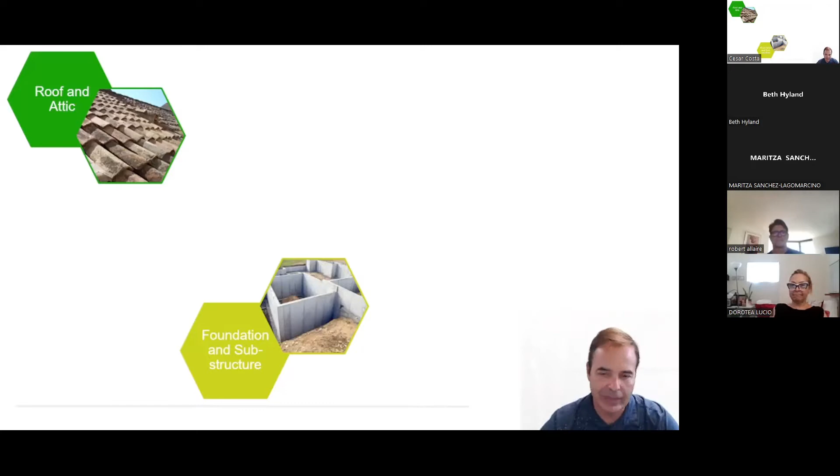We cannot see the foundation, but when there is an issue with the foundation and the house starts to respond and move, because the house is a system, any movement in any element is going to be reflected in other elements. So if the foundation is cracking and moving and the soil is moving, the floors will crack, walls will displace and move and crack. Sometimes the roof responds, sometimes you can see it in the trusses in the attic, and you can have an idea of what is going on. So that assessment is also included. Property inspectors can see if those cracks are structural cracks or not.

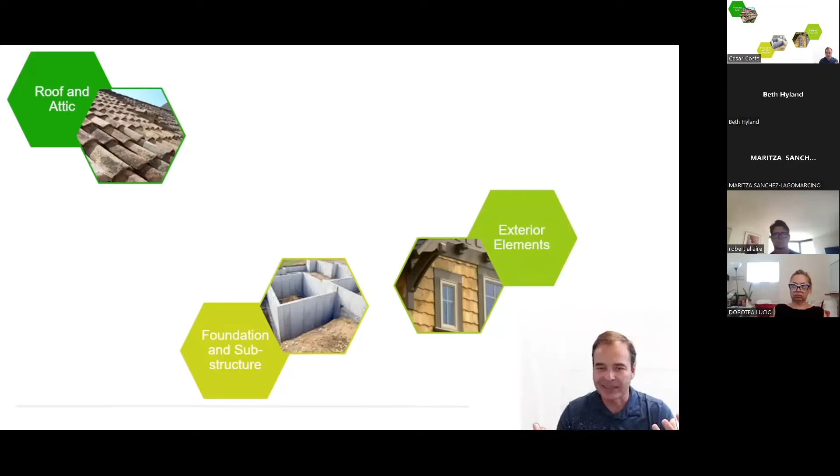The envelope of the house is very important to also keep the property watertight, maybe energy efficient, maybe keep insects and intruders away. So taking a look at the envelope of the house is very important. And then come the mechanicals. That includes the AC, electric panel, plumbing.

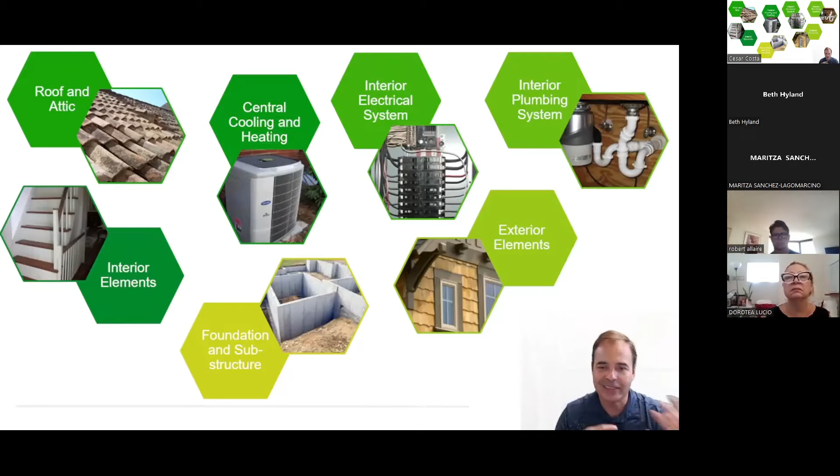AC is important because it's one of the most expensive systems in the house. Electrical is important because it's where most of the fires start, so fire hazard is related to electrical. And plumbing is very important because leaks in drywalls can trigger mold and can affect environmental conditions inside the house. So those systems are very important.

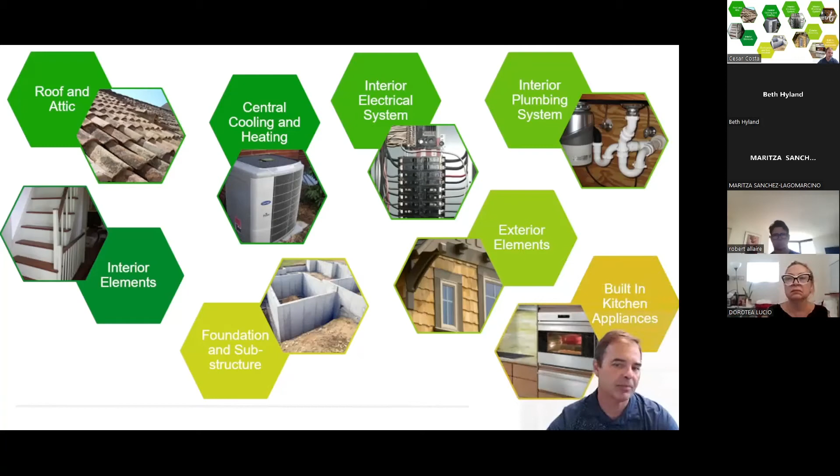Those are called mechanicals. And then interior systems, appliances, and everything else: doors, windows, interior elements. Usually an inspection takes a couple of hours. If you want to know what is included, you can type on Google standards of practice of property inspections.

You're going to find ASHI, InterNACHI, FABI. FABI is a great one, Florida Association of Building Inspectors. Those guys do a great job. I'm part of FABI as well, having meetings every quarter and keeping inspectors well informed. InterNACHI is great because there are a lot of online trainings and certifications. So for those inspectors that don't have the time, they can do the trainings on nights and weekends.

And ASHI is the national standard. Actually, HouseMaster helped a lot to build that standard 40 years ago. This is a very solid standard. They all copy from each other, and they're very similar. And also we have the law.

The law is, coffee much needed, yes.

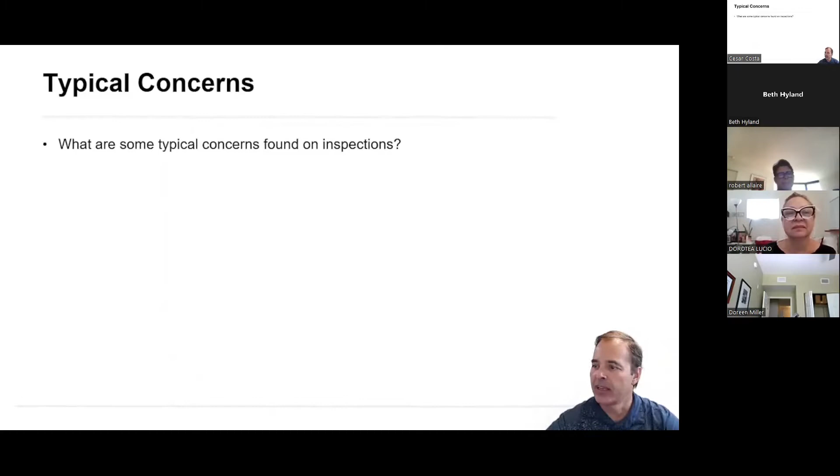All right, so let's go over property inspections for realtors part number 2 here on the first day of our 4 hours training. And I'm gonna go over some typical concerns found during the property inspection. So the first one is identifying end-of-life signs, right?

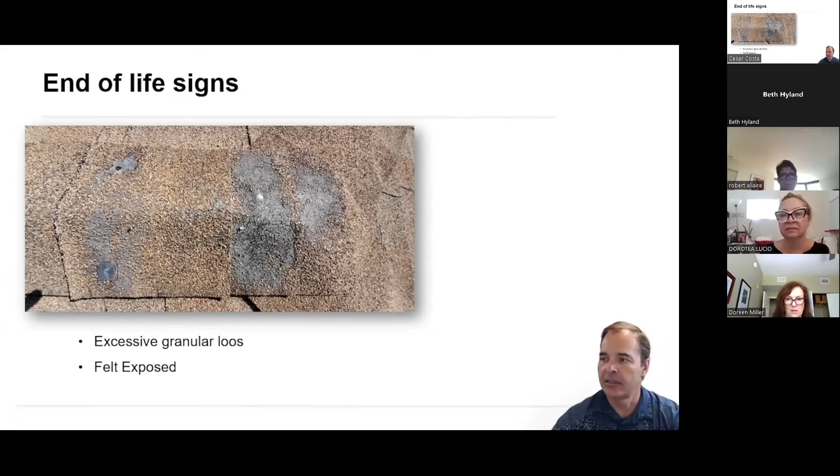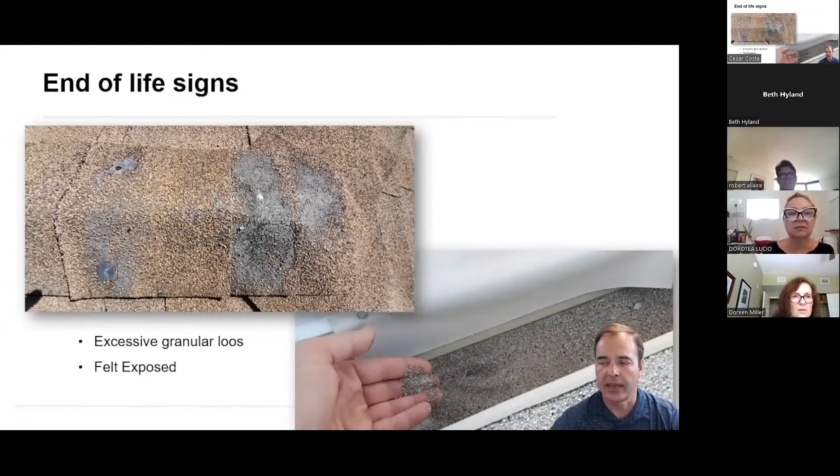So if I take a look at the roof and I see, for example, in an asphalt shingle roof, exposed nails, the felt being exposed, excess granular loss, those nails are rusted over there in this picture. All those are signs that that shingle is losing its capability to protect the deck from the water. Those granular losses are going to show in the gutters as well as a sign. So all those little details, everything counts.

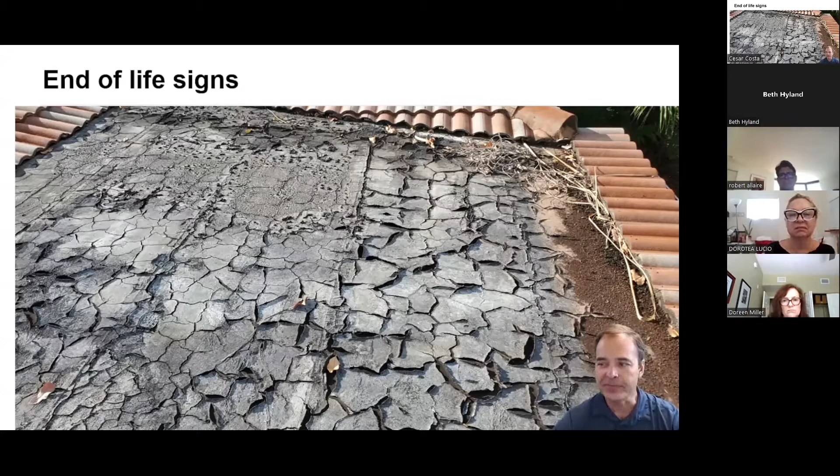Christian is saying, no bueno. It's all broken, it's dead. So we can see when the roof is at the end of its life. So on the membrane, typical signs are alligatoring, as Jerry just mentioned here, is when you see that cracking and surface that resembles the back of an alligator.

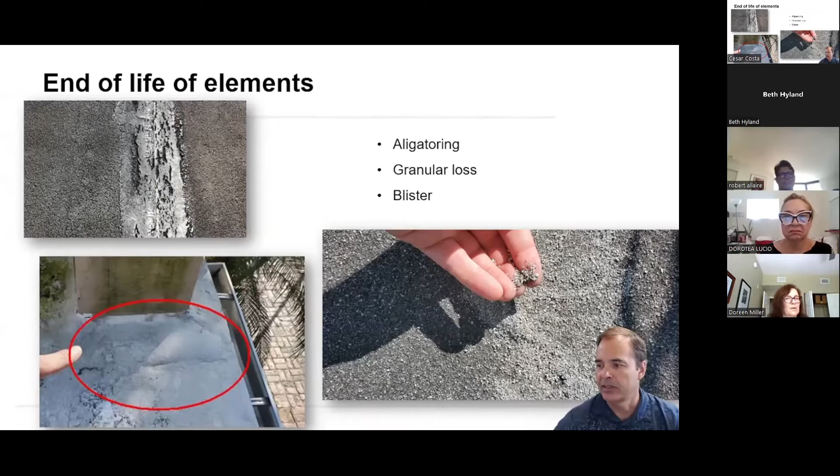When we see bubbles in a membrane roof, it's a sign of moisture entrapment. So humidity is getting below the membrane, which means that water is getting there somehow. That's a defect that needs to be reported. Granular loss, and when you have all those combined, cracking, alligatoring, granular loss, blisters, and bubbles, that's a sign that the roof is approaching end of life, and you are gonna need a professional repair there.

Another example of end of life, for example, in a water heater, would be excessive corrosion on the pipe connections or at the bottom of the tank. So let's say the tank is 15 years and there are no signs of corrosion. Maybe the tank can last a few more. We don't know, but it's probable.

However, if I see a tank that is only 8 years old and the pipe connection is rusted on the top and the bottom is exactly as this picture, you see all this rusting, this is end of life. Because when the rusting gets outside, imagine how it is inside. The rusting goes from inside out.

So much better than just looking at the age on the label of the water heater is to see what the actual conditions are, how it has been used and maintained. And I'm going to show you, element shows signs of end of life. That's a good evaluation.

I have some questions here. Patricia: to insure the property, what is considered end of life for a roof? Well, we need to see those signs of end of life, right? And I gave you a couple of examples. Alessandra: for insurance purposes, carriers don't like anything over 10 years. It depends on the roof.

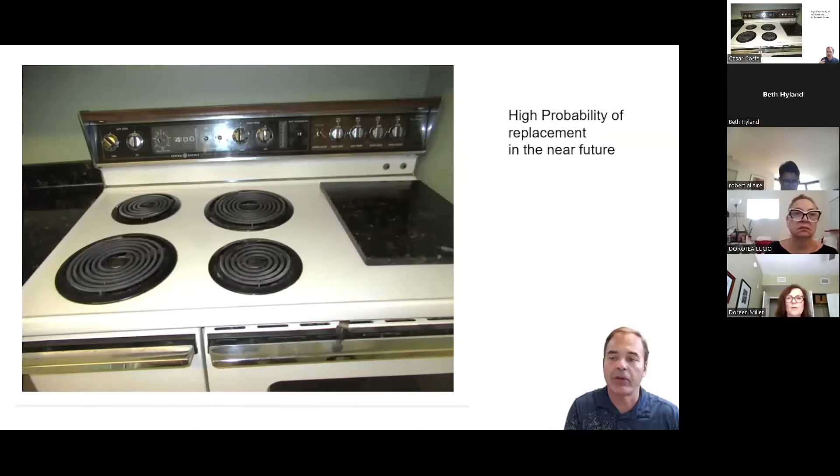All right, so I was saying on the inspection, one of the very important evaluations is end of life. Is the roof at the end of the life? Are the elements at the end of the life? So the water heater is just one example. This one, for example, it's a stove that has 35 years of operation. It's working fine. I'm not going to tell them to replace. There's no signs of end of life. But they need to be aware it's older equipment. They cannot find parts for replacement, and if it breaks, they'll have to replace. So it's just a higher probability of replacement in the near future.

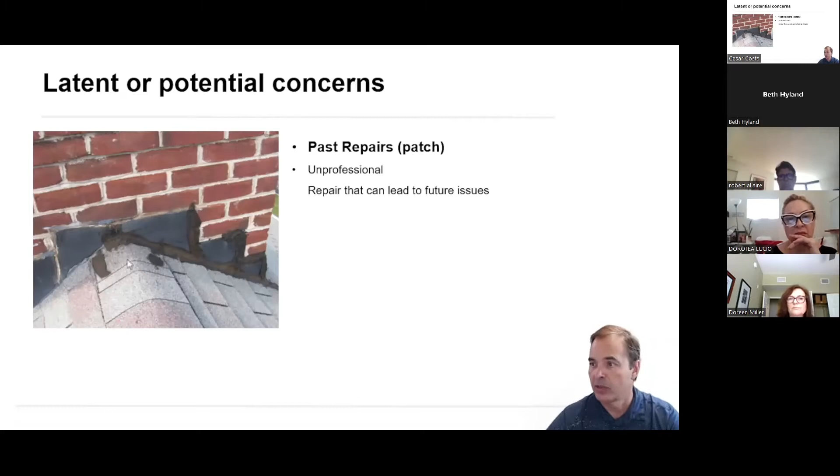Another item that is important here for the property inspections is evaluation of potential or latent concerns. So those are potential issues that will arise given the conditions. For example, in this picture, this roof was repaired, that's fine, but the flashings are not properly installed. They don't go inside the brick. They used inadequate material to seal. The way that the flashing is attached here to the shingles, it doesn't go below it. I know that it was done by a handyman. It's kind of a patch. It's called unprofessional repair, and the life of an unprofessional repair is shorter. They will have an issue here. If they repaired, it's probably because they had a leak, and the leak will show up again in the near future. So those are the things that are good to call attention to.

Another latent concern, and that's very common, is water ponding on flat roofs. Listen, flat roofs will leak. Why? Because the water just sits there. Ideally, you want a roof to take the water away to avoid the risk of leaks, right? That's the function of the roof, to make the water go away. And a flat roof that doesn't have any slope is completely flat. The water is going to just pond and stay there, just waiting for an opportunity to find a way down to the other building elements. So flat roofs have a high probability of leak. And I always call the attention of home buyers if they are buying a property with a flat roof, because they require more maintenance. If you have a flat roof, you should have a roofer stop by every 3 years to take a look and keep resealing, because those roofs will leak.

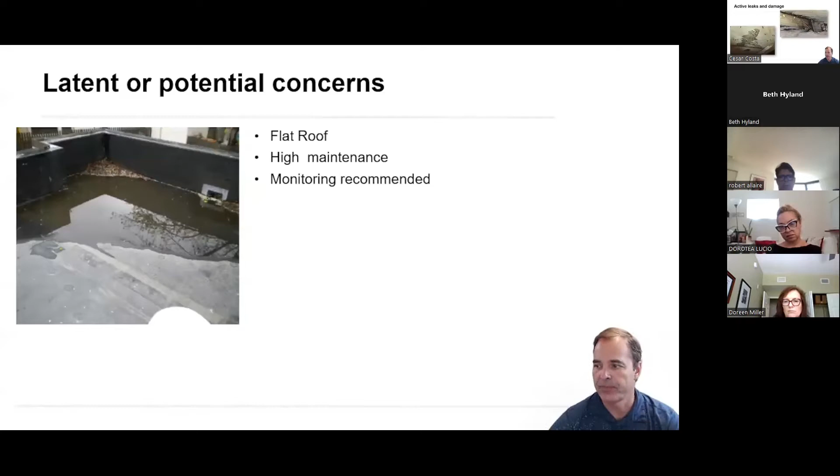The best way to find leaks in roofs is through the attic. So you want to have your inspector go over the roof, take a look at the overall conditions of the tiles, estimate lifespan and how many years remaining you have. Here in Florida it's important for the 4-point and insurance renewal, but the best place to see if there's a pre-existing condition, if there's roof leaks, is through the attic. When the roof leaks, the water is going to go through the membrane, it's going to reach the roof decks, and you will see those stains.

So have an inspector that spends a good time in the attic with a flashlight, looking at all those little corners, everything that is visible and accessible. Not all attics enable access everywhere. Newer houses have more room, and we can navigate and go around more. But spending time and seeing those things, that would call attention. And as you asked before, yes, if you have a leak visible in the attic, that's a pre-existing condition, and it will need to be fixed before you can renew the insurance here in South Florida.

All right, so the issue then with leaks, they're small and they don't have enough volume to drip so you can see in the ceiling, they're just there in the attic, is that this humidity staying in that wood may trigger two conditions. One, termites. Termites love humidity in the wood. This is just a magnet for termites.

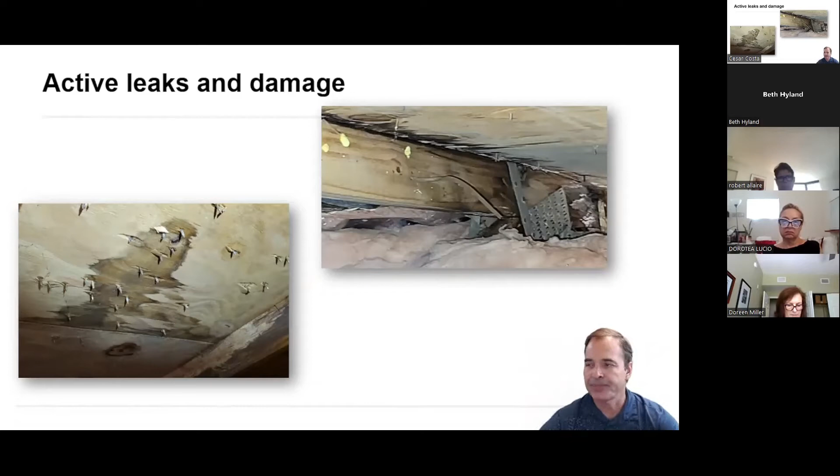So those small leaks that have been there for a while, and you can see if it is older, if the wood gets darker, like this one on the right, very dark wood, yeah, this has been leaking for a while. So the higher probability of having termites, and also mold will develop when you have humidity. So you need to be careful there.

So this is a good picture that illustrates that point. You see this wood is very dark here in the corner. And surely enough, termite here. You can see the termite damage. So they start here in the soffits, fascia, on the border, and they make their way in. Very common here in Florida, dry wood termites.

They fly around May. They find their entry points to soffit, fascia, and ventilation. And if they find any point with moist wood, they will start a new colony right there. And it's higher probability that leaks will happen on the borders because you have more volume of the water. It's the ends of the roof. It's where most problems start to happen, is at the edges.

Jerry, Alessandra, you may mean they don't like Florida litigation issues. Yeah, that's a good comment, Jerry.

So here are the termites. All right. On the leak side, another very important investigation that inspectors should do is around doors and windows. Doors and windows usually have a silicone and a sealing around them to keep them watertight.

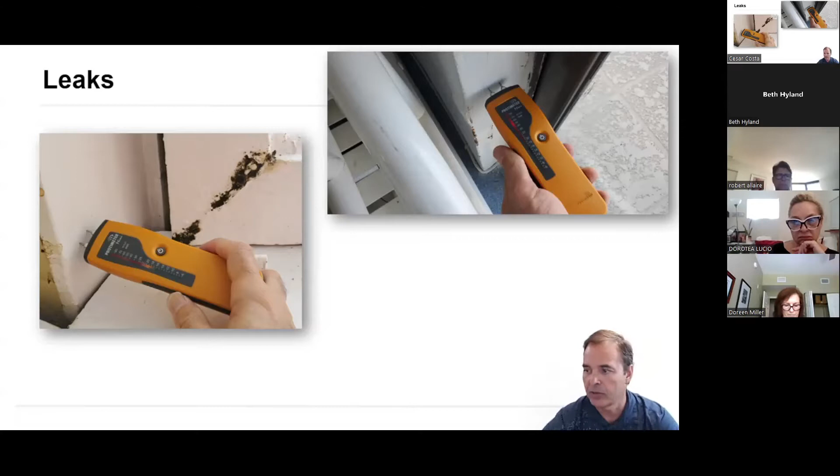The issue here, though, is when the water goes around from outside to inside and reaches the inside, the joists support the beams, the wall voids might have humidity inside, and you might have mold behind drywall. So you need to open up and repair everything to avoid any further issues. And one place that you don't want to find leaks and humidity is around AC.

And it's common to find, though, humidity on the AC box, that box that supports the air handler, because one of the byproducts of the refrigeration is condensation. Every time that you cool down air, you're going to extract humidity. And as the coils get dirty, it might clog the condensation line.

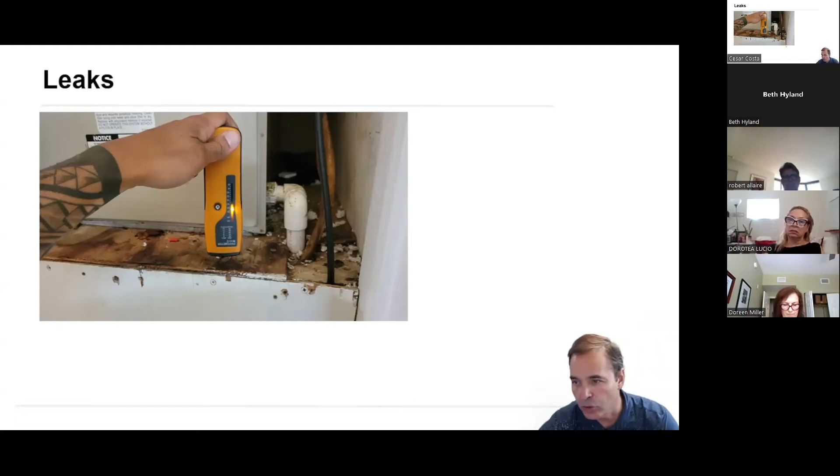You might have a leak on the water heater, and that brings humidity on that plywood that's supporting the AC box. If you have humidity on the box, mold can grow on that box. And humidity around the AC is not a good idea because that mold can be recirculated around the house and people can get sick. So you don't want to see moisture around the AC box.

And also be very careful when there is moisture around the fascia and soffits. This is a great picture that shows that. You see on that fascia rusted nails, the wood is getting rotten here, and it might not look like a big issue, but every time that you have fascia getting wet, usually it is from inside out, and it might be a leak that's coming from the roof system, on the border of the roof system. So this needs to be investigated.

And every time that we have that moisture and rotten wood in the fascia, it's just a door for a termite infestation. As I told you, termites love moist wood. In May, when they swarm here in Florida, they will land exactly in that place and they will start a new infestation. Dry wood termites are very common.

Somebody said before, and I love that sentence, there are two kinds of homes here in Florida. The ones that have termites and the ones that will have termites. I love that statement because, at one point in time, they will get there. You need to be careful with the maintenance of your property.

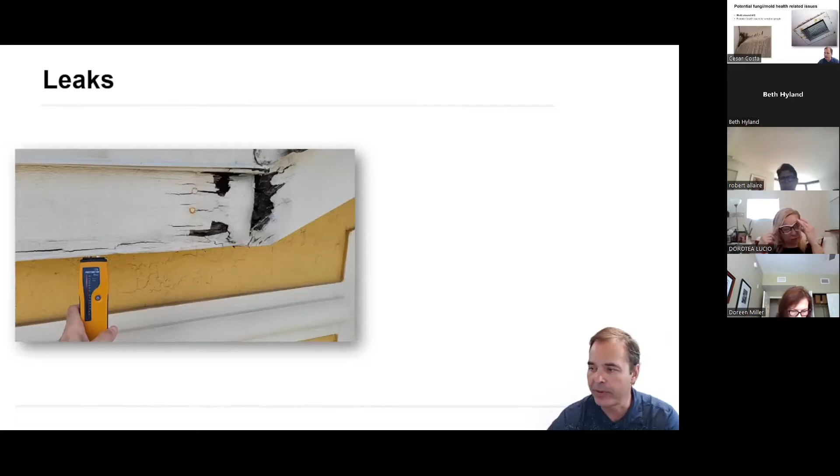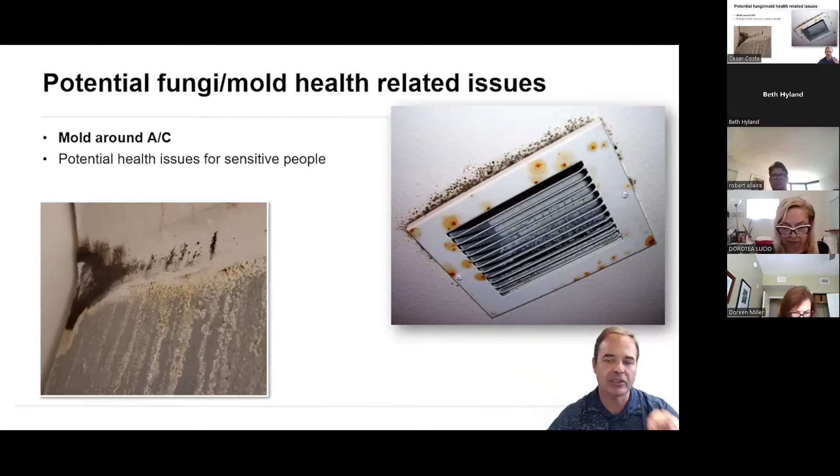So still on that moisture investigation and detection, I mentioned to you that having humidity on the box that supports the AC, you need to be careful because of mold. Also, take a look at the plenum. Take a look at those pictures of the plenum. Those mold stains are very common because sometimes the plenum is not well sealed. Air escapes, condenses, and creates mold. And also around the vents, you don't want to see signs of mold around AC components, because the AC leverages the effects of mold and people get sick. All right.

Moving gears a little bit here, besides roof, water penetration, and moisture, let's take a look now at safety and electrical. One very common concern, specifically here in Florida, is those panels. They are not accepted by the insurance companies. There are 4 brands that you need to pay attention to: Federal Pacific, Zinsco, Sylvania, and Challenger. Specifically Zinsco and Federal Pacific, and specifically the Stab-Lok design. That's the one I showed you in the picture. That rounded, colorful one, that design, it's a no.

What happened there is when they built those panels, in the 70s, they used aluminum. Aluminum was cheap. Everybody was using aluminum because it was cheaper than copper. There was a shortage of copper. However, they found out later that when you have a strong short circuit, the aluminum melts and doesn't break the circuit, and some properties caught on fire. So the insurance companies see those panels as a high risk of fire. They will not take the insurance. They will request you to replace them.

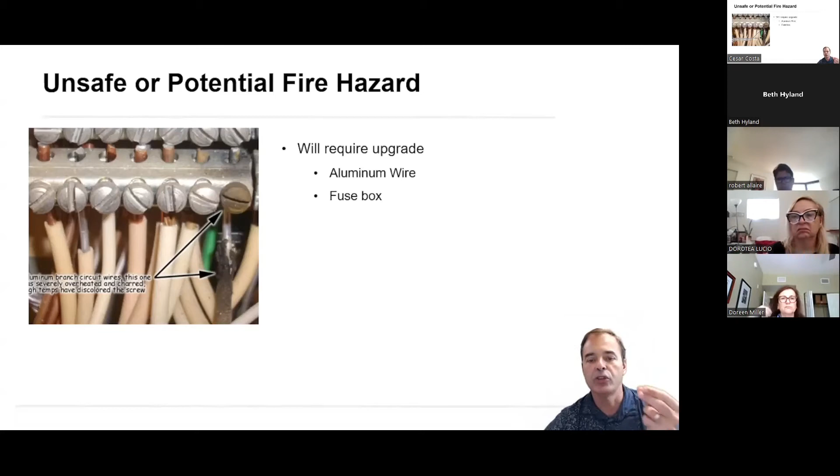Still on safety, you have aluminum wire. The issue with aluminum wire is that aluminum expands and contracts much more than copper. So those wires can get loose on the board, and as they get loose, they can create sparks, and sparks can generate fire. That's why they don't like branch solid aluminum wire. Aluminum wire that comes from FPL to connect the main panel is fine, it's stranded, they have proper connections for that, no problem at all. But solid from the distribution inside your house, not a good idea. They will request either to change the wire or use aluminum connections.

Another one is cloth wiring. They are common in the 50s and 60s, maybe the beginning of the 70s. The issue here is every time there is a strong load on a circuit, like when you dry your hair with a 2000-watt dryer, as soon as you turn it on, the current takes a few milliseconds to get stable on that circuit, and some arcs might happen between wires given the load. As I'm showing you here in the picture, it's a voltaic arc that can happen.

And if you have cloth around the wire, even if they are plastic insulated, even if they're accepted by the insurance, such as Anaconda wire, that cloth can catch the spark, and some properties caught on fire because of that. So cloth wire is a safety concern. You should replace the entire wiring of the house. That's always our recommendation. And this other kind of cloth wire in the picture on the back, that's a no-no, because the cloth is directly in contact with the wire. This one, Anaconda, is accepted by insurance, but it's recommended you replace it.

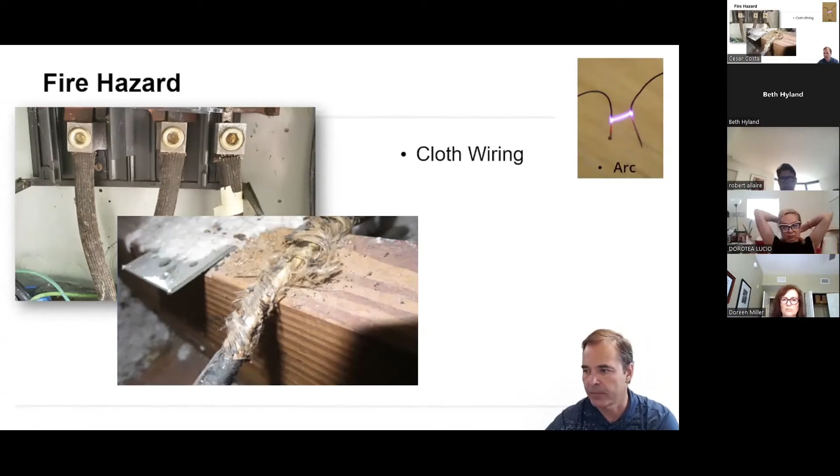Okay, another topic is cast iron pipes. When they built those properties, 70s and before, they had that horizon that these pipes would last 50 years, maybe 100. Wow, that's great. The material is going to last for a long time. Guess what? 50 years has passed. Back to the future, right? After 50 years, especially here in South Florida, because the soil is so humid, the corrosion might get to a point that these pipes might not be usable anymore. It's the end of useful life.

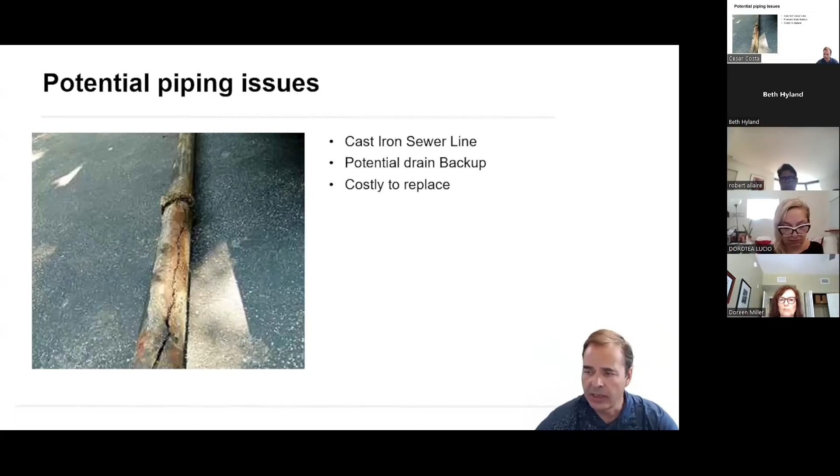If the pipes crack, dirt is going to get inside, they will clog and can create a backup and a mess in your house. So ideally, if you have properties from the 70s and before, you want to have a camera scope inspection to see if those pipes are broken. You will have to replace those. It's a matter of time. Maybe 5, maybe 10, maybe now. So you want to have that idea during the inspection to avoid costly surprises. To replace those pipes, it's about $15,000. That might be the cost of replacing an asphalt shingle roof on a small house. So that's relevant, it's important, it needs to be done.

Patricia has a question back on the cloth wire. Today, no cloth is used. Everything is plastic, designed not to catch fire. It's thermal insulated plastic. Yeah, Jerry, the second cloth wire. Yeah, exactly. That was a beautiful example. Those pictures, for me to be able to find those specific situations, sometimes it takes 1,000 inspections just to find that one picture to put here in the report. And everything here I took with my camera, so it's inspections that we have done.

All right, so piping issues. Cast iron pipes are one. Another one is polybutylene pipes. Polybutylene pipes were used in the 80s and they were discontinued in 1994. But what happened is that in 94, builders knew they were going out of production and they were stocked with those pipes. They used a lot to finish the stock. So there are a lot of homes, 94, 95, up to 96 with poly pipes. So I'm very careful when the house is built in 1994, 95 to search for those pipes.

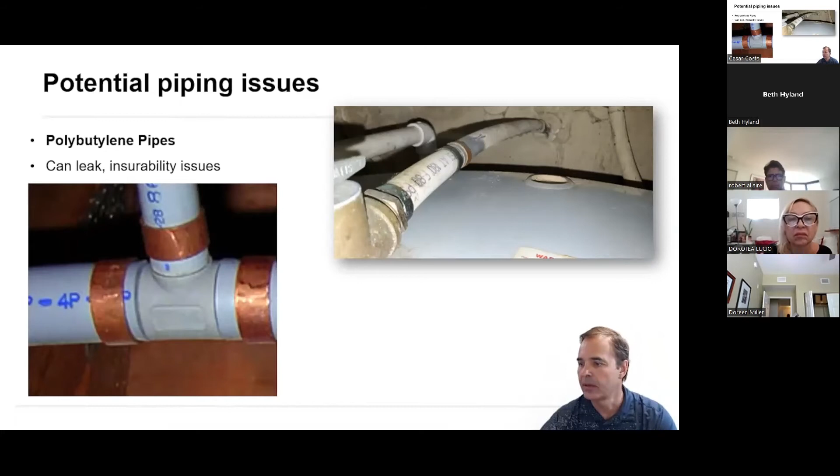All right, defective installations, that's another topic. Some elements are not installed properly. One example, and it's very common, is water heaters. The water heater has a TPRV valve, temperature and pressure relief valve. That little thing on the top of the water heater. That's because if the thermostat doesn't turn it off and the tank keeps heating, it can explode and become like a rocket. You can find funny YouTube videos of water tanks just going like rockets. So that valve will avoid that, because if the temperature and pressure build up in the tank, it is going to release and let the water flow away from the tank and avoid an explosion.

But this valve needs to have enough throughput. Most of the valves here in Florida require a 3/4 pipe. But when the handyman comes to install, not a plumber, they're going to put a 1/2-inch pipe. It's not up to the specifications. This needs to be fixed. It's a safety concern. So something so small, like a small piece of pipe, can be a safety item as well.

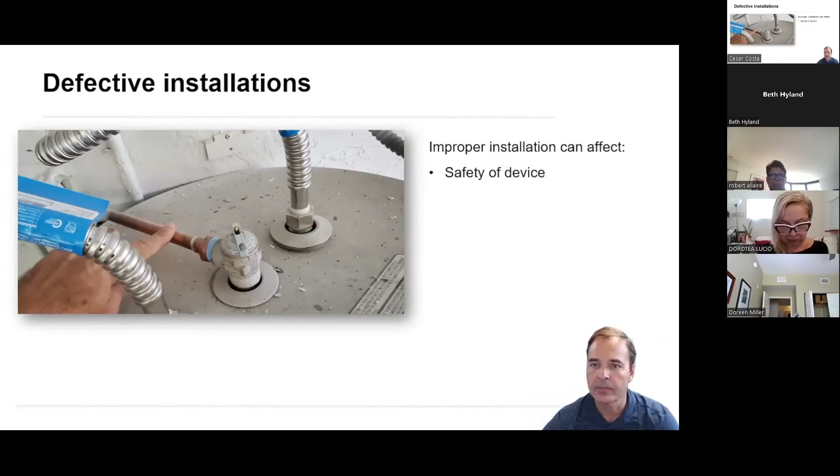So let me see some questions here in the chat. All right, can I ask the inspector? Okay, infrared camera, answered already. We will be able to tell if there is a leak that was painted over only with the infrared camera. And listen, I think there are a couple more in this list, but I can't find them. Okay, if you find out, let me know, Alessandra. I'll come back to that issue for you. Jerry, I already saw this. Patricia, okay, I already went over this one.

Okay, Jerry, how would you know if a pipe under the slab is leaking? Water usage increase? I got, Jerry, one of those cases: the supply pipe under the slab was leaking and we didn't see it. So if it's leaking just a little bit, it's going to be almost impossible for you to know. It's going to be through the water bill, and it's harder to investigate as well.

But with time, as these leaks expand, that humidity is going to go through the slab, and by capillarity you're going to see stains, and that is going to start affecting the floor. Then we can see the leak. So it all depends on the volume and time of the leak. Those are the issues that are hard to catch, and those are the limitations of the inspection. Those are called concealed defects, situations where we can't help much.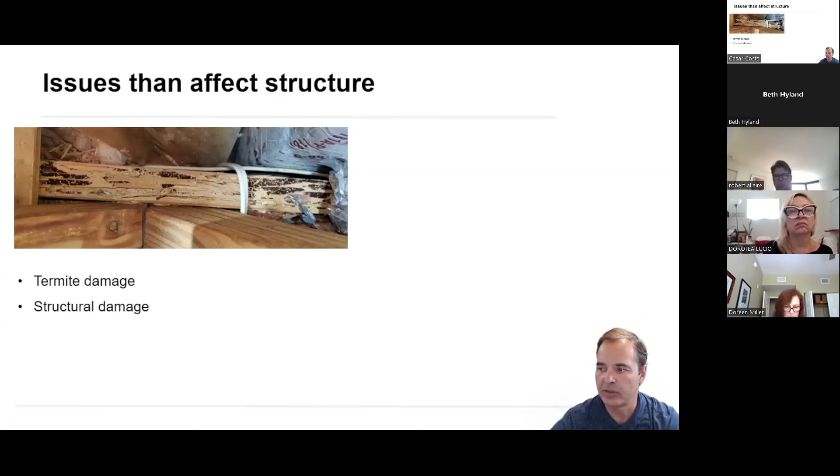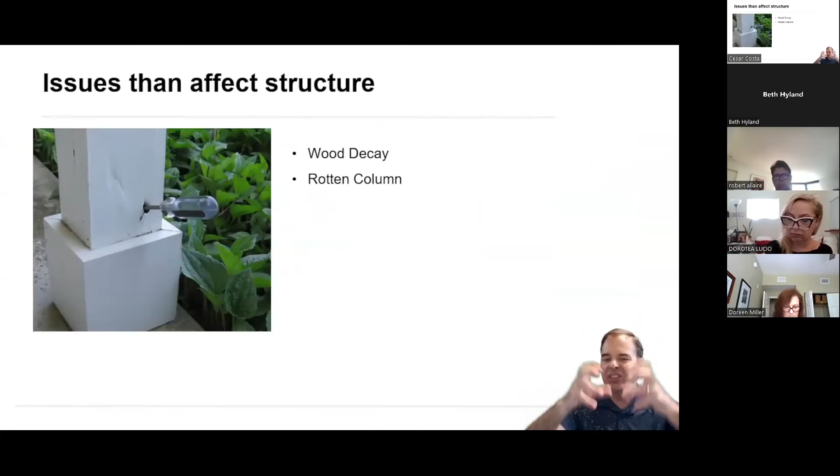So, issues that can affect the structure. This is one example. Drywood termites have been in this house for a long time, more than 10 years, and they have been eating a lot of those trusses. This is looking bottom up, so that can affect the structure. Probably this piece of wood needs to be sistered and reinforced to keep the integrity of the structure. Also columns and support pillars, like this one: you see my screwdriver went all the way through. It's rotten and can affect the structure of the house. That should be noted, anything that can affect the structure.

And this picture exemplifies well what a structural concern is. A hairline crack is random, very thin, and doesn't follow a specific pattern. But a structural crack usually follows through the bricks and moves along the structure. You can see this crack starts very small, follows the brick, and widens up. Like an alligator, it starts small and widens up. That's a structural crack because you have displacement, you have movement. Things are getting separated, so you know there is movement.

In this case, you might need a structural engineer to evaluate. Sometimes you need to put in those helical piers to reinforce and bring the structure back. Anything can be fixed, but it's important for you to raise that flag that something is going on. This other picture also widens up. If I take a quarter and put it flat and it fits in the crack, that's an important crack, and usually that is structural.

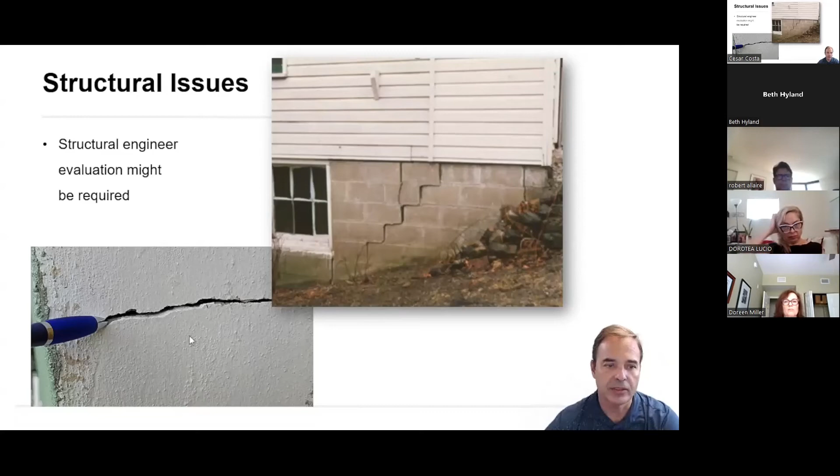And in this case, it's not only moving this way, but also this way, vertically and horizontally. We have two kinds of displacement that show movement, and those are the situations where you need to be careful, and they should be noted. To finalize, what do you think about this picture here? What is going on?

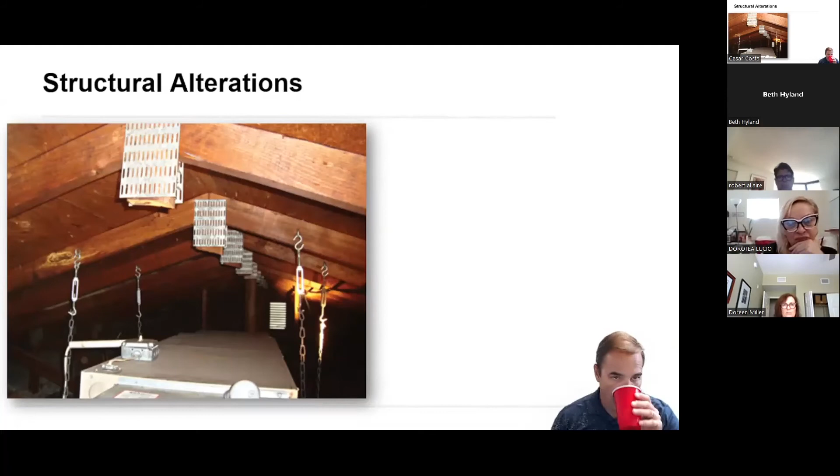While you tap the picture, I have a quick question here for Lema. What if the home has cast iron pipes? I'm going to talk more about that tomorrow. It's a good idea to do a sewer camera, snake camera scope, to look inside and see what are the conditions of the pipe.

Gandhi has a question here. Homes that are unattended, or you have an outside valve, pressure cleaning companies drive up, fill up the water tanks on the back of the truck, most recently happening to one of my listings. Yes, that's a good point. Thank you for sharing.

Jerry, get out from under that roof.

Yes, exactly. Patricia, the building that collapsed in Miami, why was it not caught? That's a long story. We can talk offline because I want to focus on the things that we want to cover here. It was apparent, it was structural, there were signs. What happened is that the people didn't take action on what was already spotted before. So now they're going to include 4-point inspections for condos, but that doesn't address the structural concerns. But that's a big topic there about the Miami building.

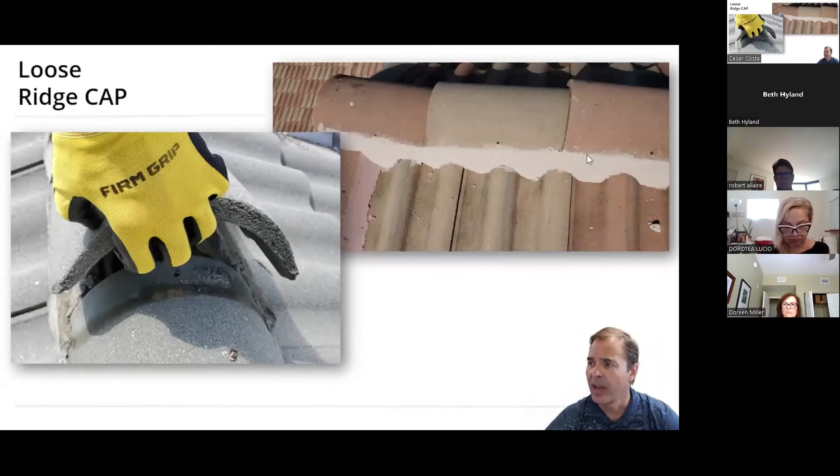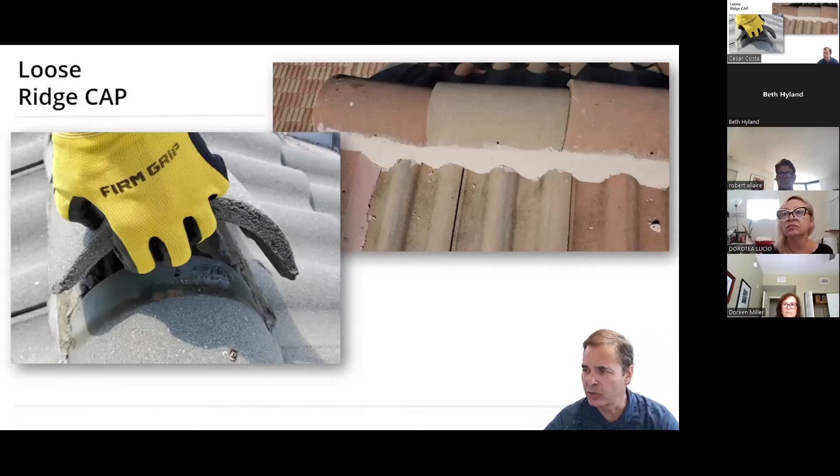But keep in mind, though, that 86% of issues are just maintenance. And we got a lot of maintenance. So only less than 15% are a concern that you should be worried about or take into account. Everything else is maintenance. Even loose ridge caps in the roof, that's maintenance. All old roofs will have loose tiles. And what can you do? Just cement them back, like I showed in the picture. I saw roofers trying to sell new roofs because of loose tiles, because they're trying to make money. Most of the cases, you might not need it. Just cement those back. If you have broken tiles, you need to replace the tiles, but most of the time you just cement back, very simple repair.

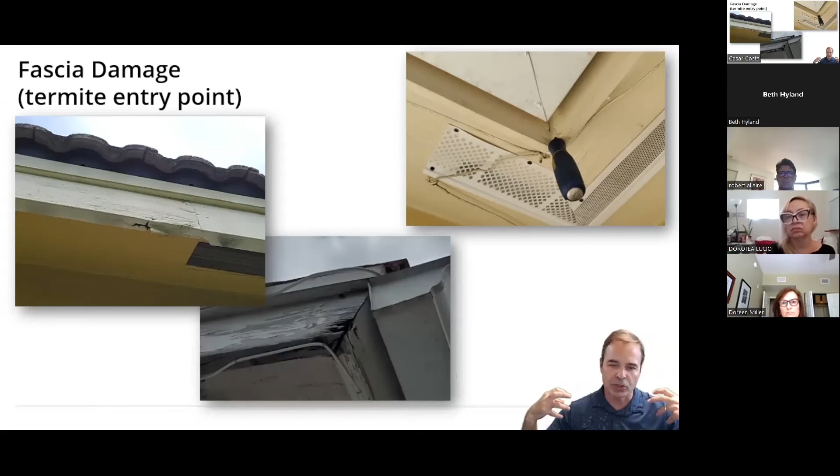Be very careful with fascia maintenance. I mentioned that before because that can be a termite entry point. Use a moisture meter, you can probe with a screwdriver. Take a look here, my screwdriver went in all the way. So they painted, they're trying to cover, but this wood that is damaged needs to be replaced, because when you have that moist, rotten wood, it's gonna be just a magnet for termites. It's like when you go out on the Everglades at 7 p.m., end of the day, you just attract those mosquitoes, right? And you're gonna get bitten a lot. This is the same thing, it just attracts those termites. They start from the fascia, soffits, dry wood, they make their way, they keep crawling. When they reach the attic entrance, it's because they have been in that house for a while, 5-10 years.

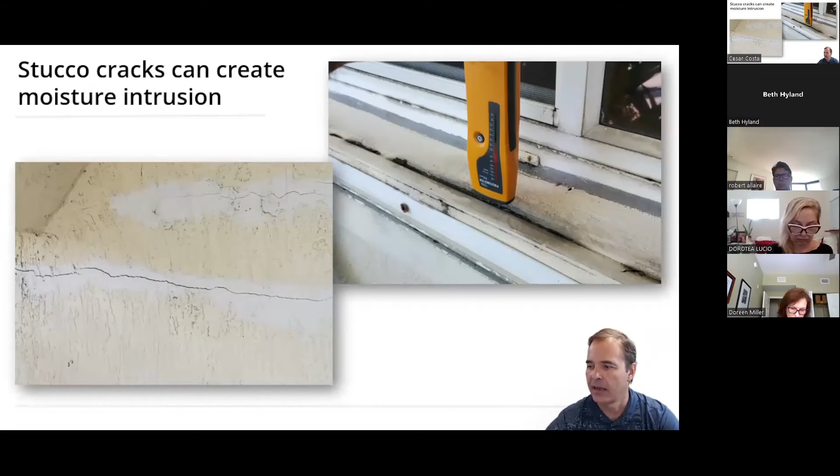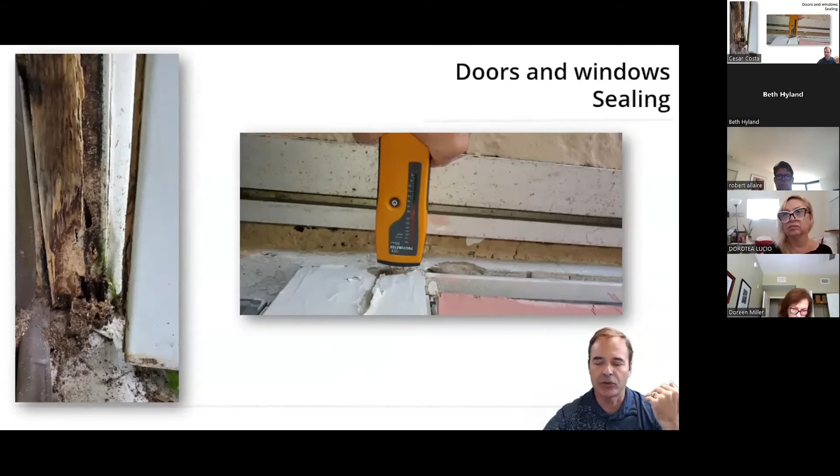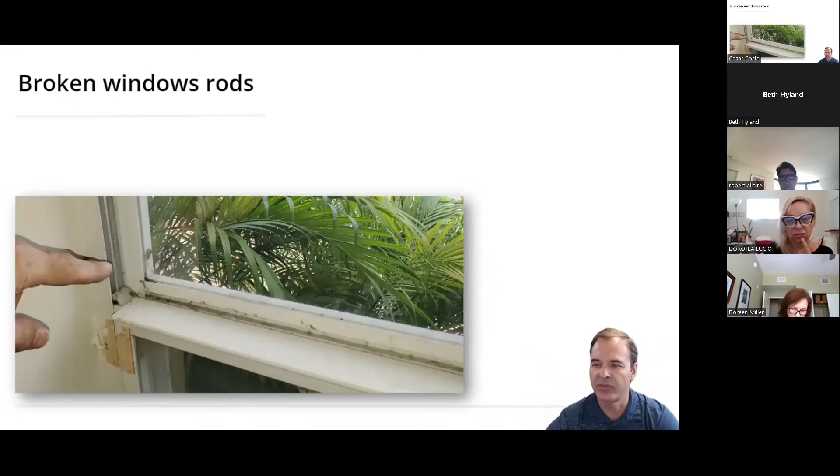Cracks outside need to be sealed because water is gonna get inside, and with time it's gonna get to the drywall, moisture will develop into mold, and that can affect living conditions. It's very important to seal doors and windows because that moisture is not only gonna go to the inside through capillarity, but also that rotten wood will attract termites. Broken rods we find all the time. People don't open windows so much here in Florida, and they tend to break when you use them after 20 years. It's a good idea to have maintenance once in a while, every 5-10 years, to fix those rods, lubricate windows. Most people don't do it.

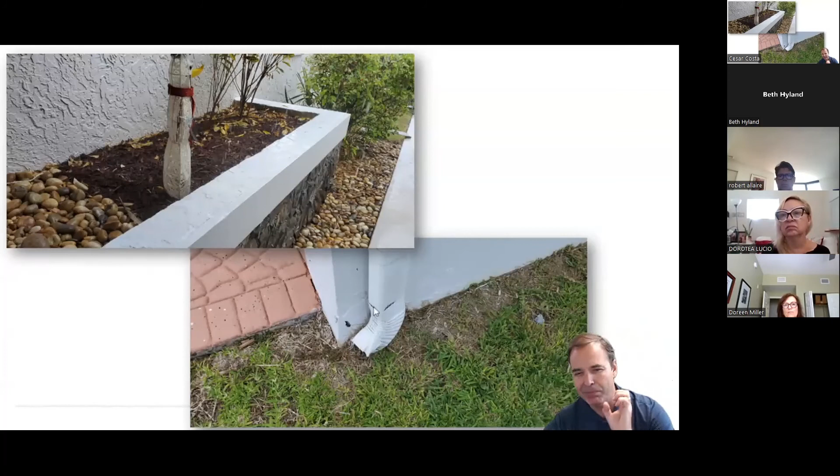You want to avoid having water accumulation around the house. Those planters are not a good idea because that water is in contact with stucco, especially if you have a wood frame house, or water around the foundation, this is just a magnet for termites. And we don't want to attract subterranean termites. Another block of things that are seen on inspection concerns safety. And those are very small, very simple to fix, but yet very important. Double tapping: you connect two wires to just one breaker.

A handyman came there to add a new circuit, add something new to the house. Instead of connecting with a wire nut, they used the breaker to connect additional wire. It's not allowed. An electrician would never do it. When I see this, I know there was a handyman. That's because when you increase the volume of copper on the connection, you increase the expansion and contraction, and that wire can get loose on the connection and create sparks that can generate fire.

There is a proper way to connect wires. You use a wire nut outside of that breaker. Very simple. Can be done in 10 minutes. But you will not be able to get insurance if you have double tapping. Insurance companies will also not take lack of grounding. Those two-prong wires cannot. You need to add grounding because that reduces the risk of fires.

Trip and fall hazards and all those kinds of things need to be addressed. You cannot have a trampoline in a swimming pool. Not accepted by the insurance. It's another safety issue. And if you have a swimming pool, it's very important to have protection. As an owner of a house, you need to avoid the risk of a kid getting inside your swimming pool and drowning. And if that happens, you will be responsible.

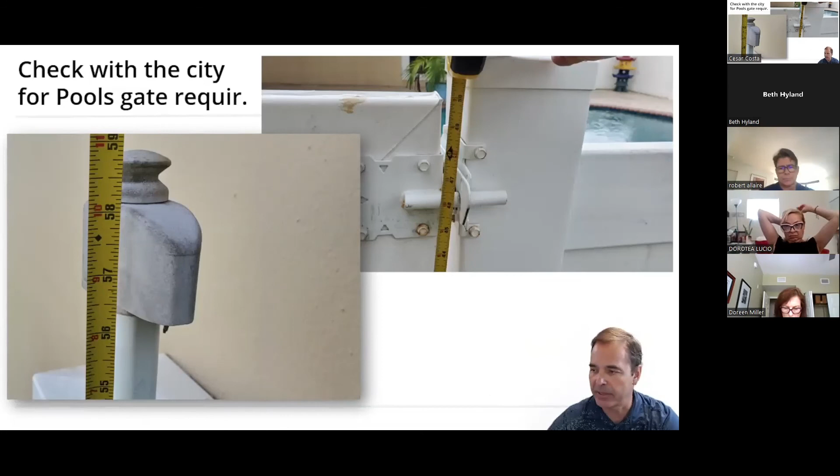And the gate needs to be at least 4 feet high. Those specifications can change from city to city. You need to have child-proofing, maybe a fence around the swimming pool. When I got my swimming pool approved a few months ago, I had to have alarms installed in the swimming pool. That was a Cooper City requirement, so we need to check with the city. And then you have everything else, just little maintenance.

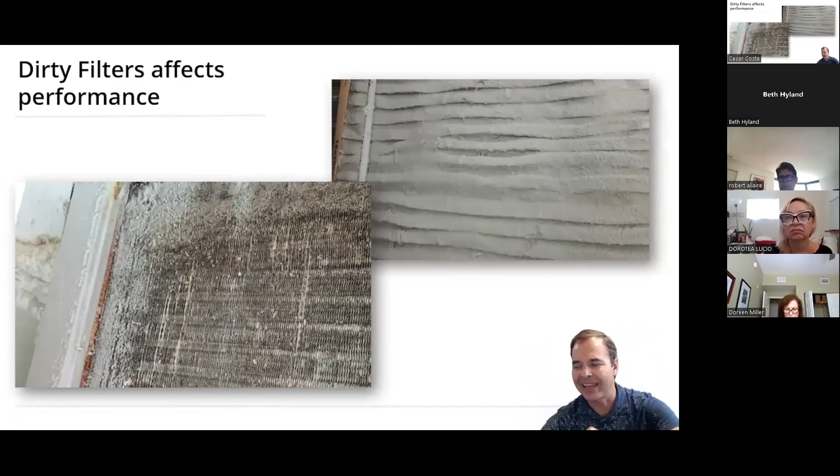Coils that are dirty. You need to have an AC guy come basically every year to clean the coils so the air can flow well. And all this dirt, when it gets to the condensation lines, can clog them. Ideally, you want to put vinegar in the condensation line every 6 months to clean it. I have a video on YouTube where you can see how that is done.

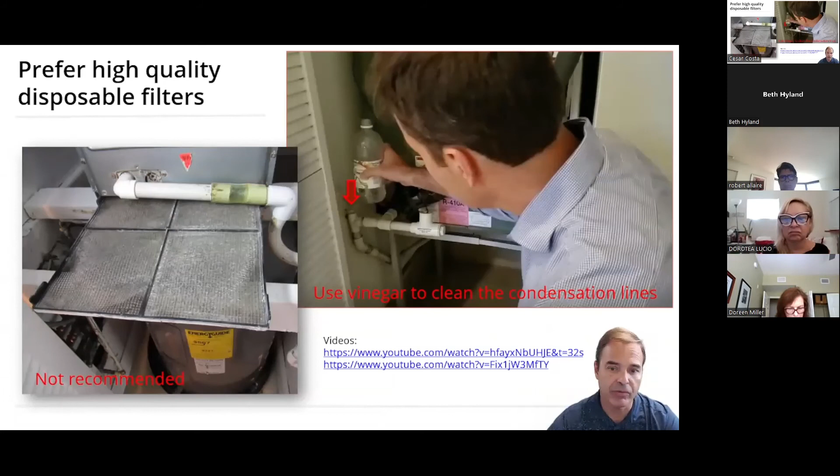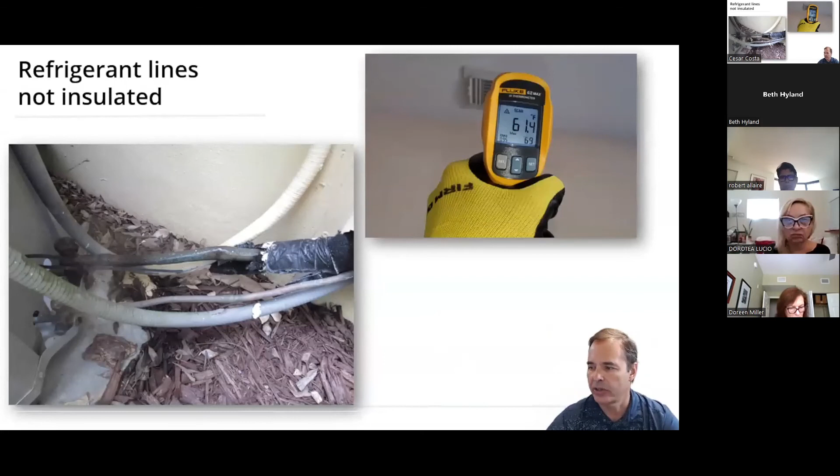Avoid washable filters. You want to use paper filters that you can replace every month or so. Those are more efficient and will avoid bacteria and fungi growth. Make sure all the AC lines are well insulated so you don't lose energy on your AC. Make sure vents are clean. You don't want to have mold on vents. This white thing here is mold.

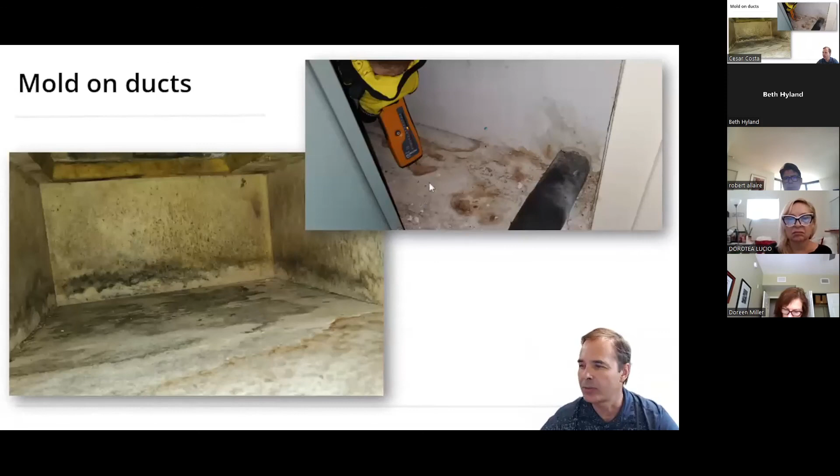Clorox is okay for the condensation line, but it's going to kill the plants outside. If you put vinegar, you don't kill the plants. So it depends on what you have at the other end of the condensation line. Take a look at this house. Beautiful. Everything looked in place, but we took a look at the AC. Ducts were all moist because the AC leaked, and fungi and mold were growing on the ducts. That's something that you don't want to have.

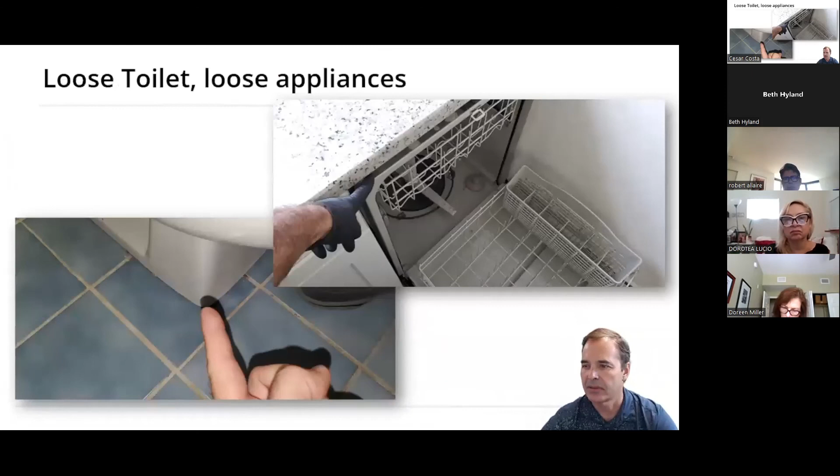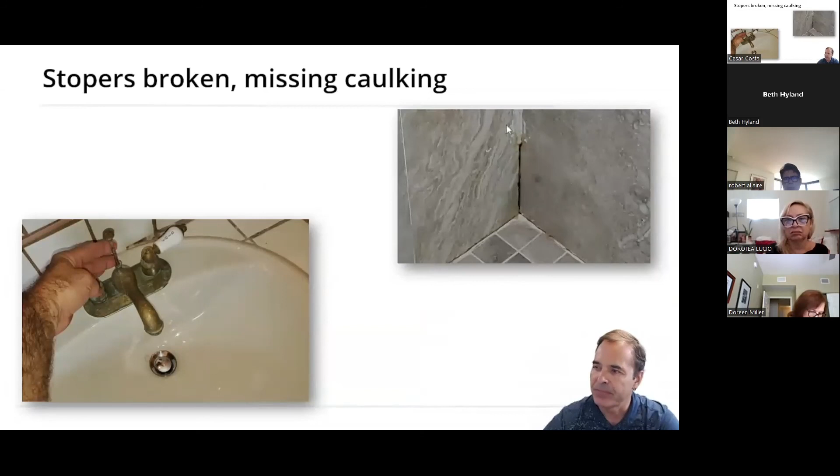Accordion pipes, not a good idea. They clog. Plumbers will never use accordion pipes. Only handymen. That is not accepted. Patched pipes, that's going to be a problem. Leaking water heads, diverters, loose toilets. You need to remove the toilets and change the wax ring. Loose appliances, pop-up stoppers, they always break. Sealing of the shower tiles, very important, and so many other small things.

But the key here is during the inspection, don't sweat the small stuff. Don't get stuck on all the maintenance items. All homes will have maintenance items. Try to focus your energy. What are the most important and critical elements? We're going to discuss more on that tomorrow, and I'll give you tips on how to negotiate your deal.

Tomorrow, I'm going to start going over auxiliary reports such as 4-point, wind mitigation, termite, mold, sewer line, infrared, seawall, and everything that is not included in the scope of the property inspection and still can be added. And I'm going to talk about how to deal with difficult situations and address problems that can come after the inspections. I'm going to talk about pre-leasing inspections, new construction inspections, choosing the right inspection company, and so much more.